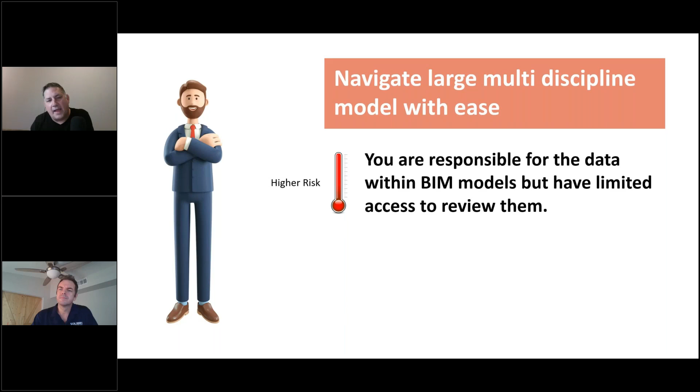BIM models are large, they're multidiscipline. It's a high risk if you have limited access to them - if you can't see what's in that black box, but you're responsible for what happens in it, that's a high risk. How do we lower that risk? Well, with Solibri, you can quickly open any model, control visibility, even add measurements and markups in a very simple fashion.

John, would you be kind enough to share your wisdom with us and show us how that could happen, even for a senior architect? Yeah, sure, Joe.

Right, yeah, I'll try to cover it low level and high level because we have some people that already use Solibri. At any time, Joe, feel free to hit the pause button for me on the demo, and we can dive deeper if you want to roll back and go into more depth. So this is Solibri, this is the interface, and this is the model layout.

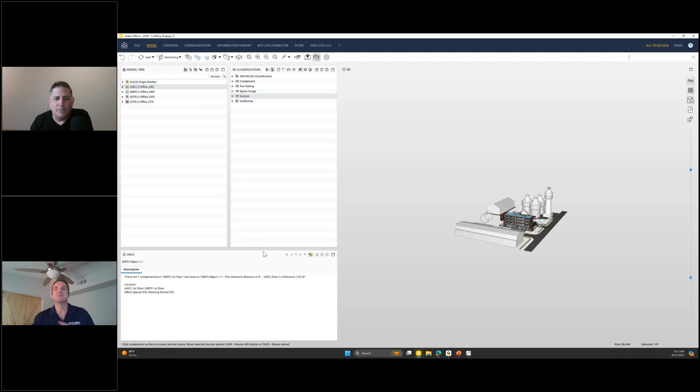I don't want to get into the details, but you'll always have a 3D view picture of the space of the project. On top of that, you have a BIM, a building information model, so you have all this information at your fingertips, and you want to actually harness that as well. These views are grouped into different layouts.

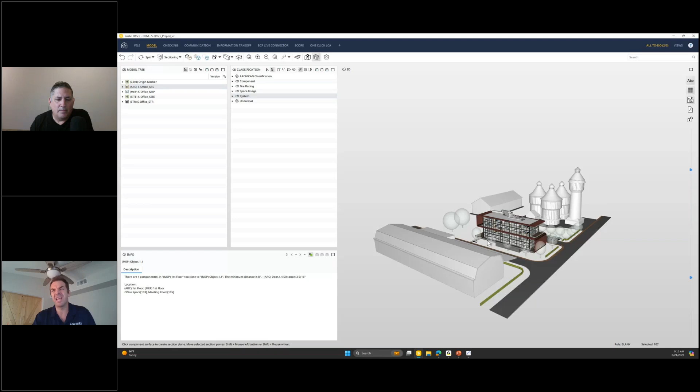What I'm showing you now is a layout to interrogate the model quickly, because design applications aren't tailored to do these reviews as fast as Solibri. So if you wanted to, you can put on your structural hat and isolate the model like that. If you wanted to look at just the MEP, you can turn those components on.

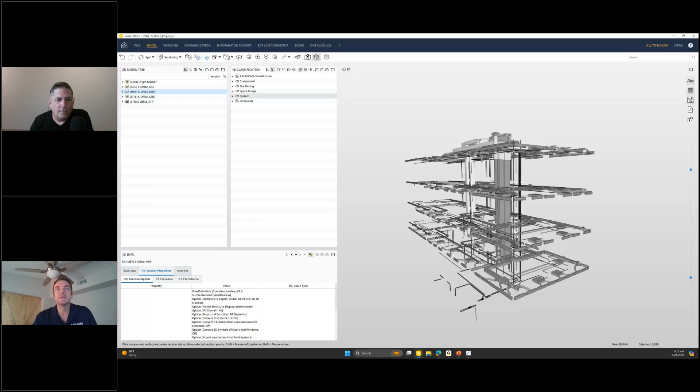You can actually go deeper into those individual systems if you wanted to see where are my ducts and where are those individual types of duct systems in my model. So you're taking the best of both worlds, the information and the 3D model in that space.

If you're interested, these IFC models are well structured. It's not from a specific design application, so you can have your stakeholders actually view into these review softwares, since it takes less time to learn something like Solibri than a full-blown design software in terms of navigating around and getting the use out of it.

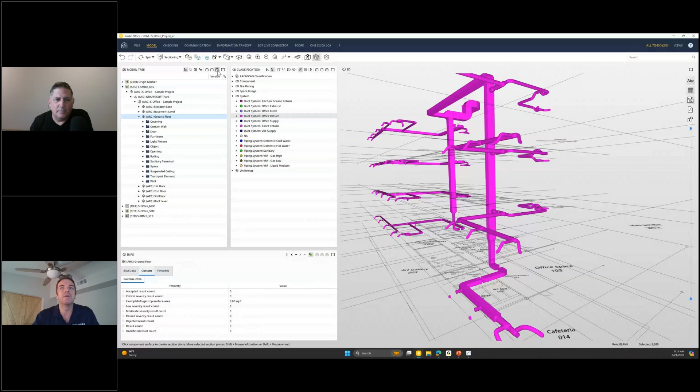You can actually peer into maybe just the ground floor of your architectural model. I guess these curtain walls span up the entire floor, so I can turn those off. I have my spaces color coded, so I can turn those off too, and peer into this first level and see kind of a floor plan. If I wanted to, I could actually take an inventory.

In this model tree that's well structured, I'm focusing on the architectural model. I can turn on these three groupings, and this is a selection basket. Think of it in terms of what you want to visualize and what you want to work with.

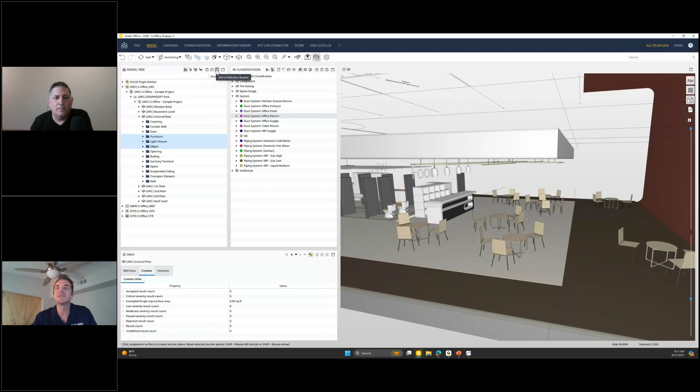So now I've just isolated, we're isolating and viewing the information that's important to us. I can slide down what is called a footprint control, and this basically superimposes a plan view.

So now I can actually do a walkthrough of the model with the inventories of the furniture and see where I am.

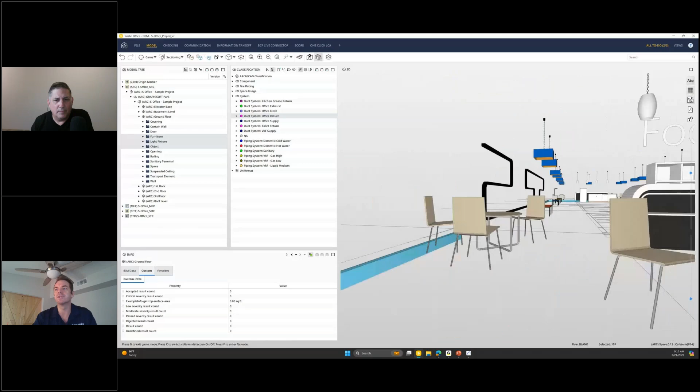And if you're more comfortable, maybe you can take a top-down view. We have different perspectives, actually called a perspective or orthographic projection. So if you want to take more of a plan view, you can zoom in and say, okay, here's my cafeteria where my tables and chairs are.

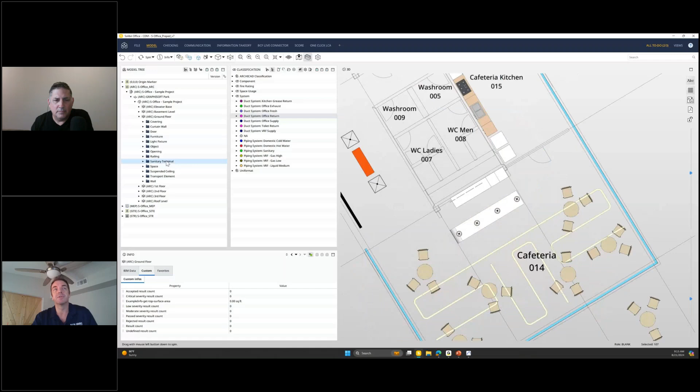And if you wanted to, you can search on your sanitary terminals and then look at those, and those are my sinks and my toilets.

One of the features that Joe and I are quite fond of is the simplicity of the sectioning. You don't have to know where your section planes are in X, Y, Z, but we have a tool called sectioning, and if you hover over it, it'll give you a little hot tip of all the different hotkeys, so you can really quickly, just by hitting keys on the keyboard, tailor to what you need.

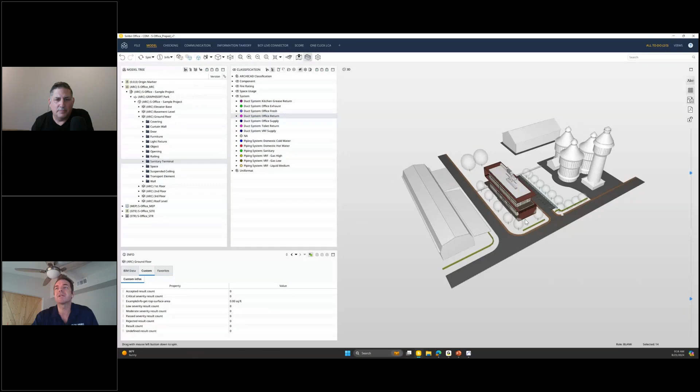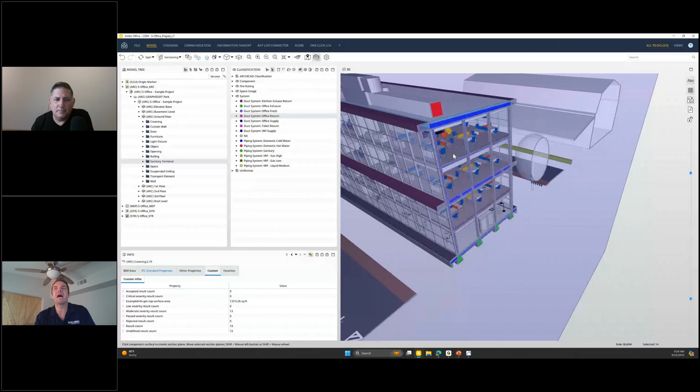But even at that, it's so simple. You click on a surface, let's go over here, and think of it, first I have to click it. Click on a surface. Now I've got a section plane, but think of it kind of like a CAT scan or an MRI, or maybe one of those anatomy books of the human anatomy, where it actually color codes the systems of a body. This is like the systems of your BIM, and it's actually color coding, and you can customize it.

I have mine set to be blue for architecture, structural green, and MEP is red. So as I cut through and splice through this model, you can see I've come to here my stair, my fire exit stair. And you can see the structural - this is probably because it's fire rated walls here, structural walls, and this is my red systems of MEP.

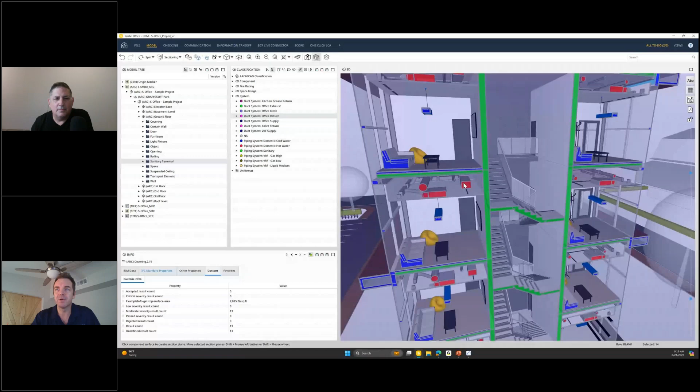If I go a little bit further in, here I can see a mechanical shaft, here's my little elevator shaft, and mechanical runs down. And again, you can even turn on spaces here.

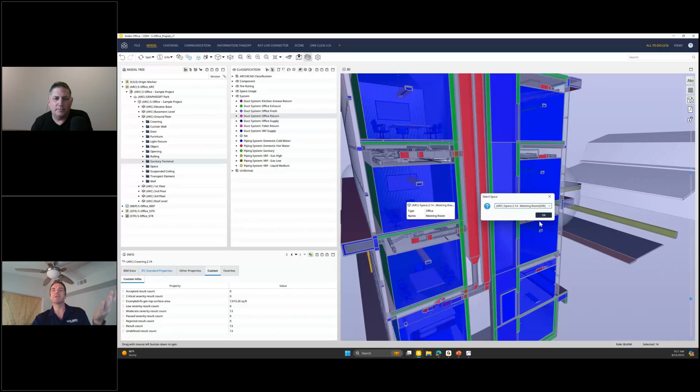If I wanted to, I could actually section real quickly just around this space - this is my meeting room. Click OK, I have my walls and the spaces turned on. Again, I could use keyboard shortcuts, or I can just turn off walls, turn off spaces, and then there you go.

I have my sectioned room. Wow, right? You can turn this on, and you can drag these little corners here, which is pretty neat, and you can actually drag them up, if you get to it.

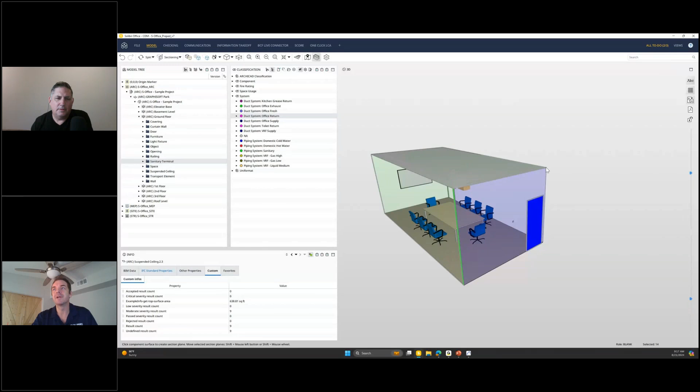There you go, sorry, I keep clicking the wrong button. No, there you go, beautiful. See how simple it is, wonderful, because there's so many different ways you can section these planes so quickly.

That's the gist of it. It simplifies the BIM experience for an architect to get in there and start, maybe later in the evening. I know many of you work late evenings, but just open up the latest, see what's happening, make sure everything's on track. That was beautiful, John. Thanks so much. Let's go a little deeper into visual checks. You did a bit of that, but let's go further.

So what's high risk, John? When we look at high risk, in terms of BIM, as we mentioned, the senior architect is often on the outside looking in, maybe asking for or waiting for a set of drawings to be created. But that's higher risk because that means possibly hours, days, and weeks that are missed. But with Solibri, we can actually apply color coding. So if you wanted to check the fire rating, you don't have to look at the plans to see what the fire rating is on every wall. You can visually color code the model and spaces, and even extract quantities.

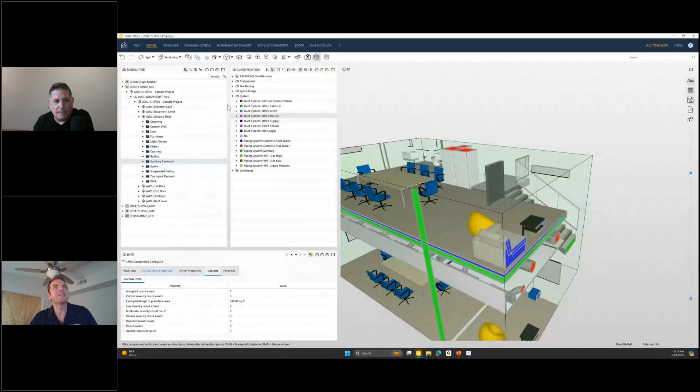John, can you show us how that's possible, this color coding to visualize the model and the data? Yeah, sure, Joe. As you said, maybe we didn't say it directly, it's called classification. You can think of it as organizing your components by some property or category.

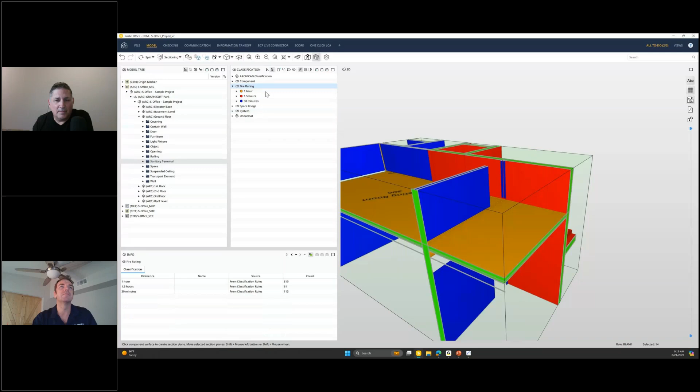So I showed that briefly with the systems, but as Joe mentioned, you can do that for fire ratings. If I wanted to put on my fire life safety hat, I could click on fire ratings and turn everything on the model, turn my fire ratings on, and you can see it's grouping these components and visualizing again best of both worlds, information and model based off of those fire ratings. So if I wanted to just focus on the 1 hour, 1.5 hour, and 30 minute ratings, you can see these are predominantly coming from my structural model for my 1 hour, and these 30 are my architecture partition walls.

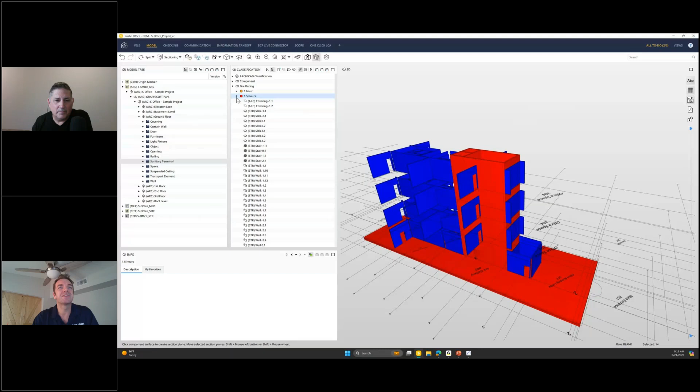You can turn things on and off and dig into it if you want. Sure enough, this is my 1.5 hour rating structural walls that goes down my fire exits. I can see my elevator shafts. And just to clarify for everyone, we're looking at it through fire rating, but we could also look at it through structural or non-structural members. We could look at that data in all kinds of different ways.

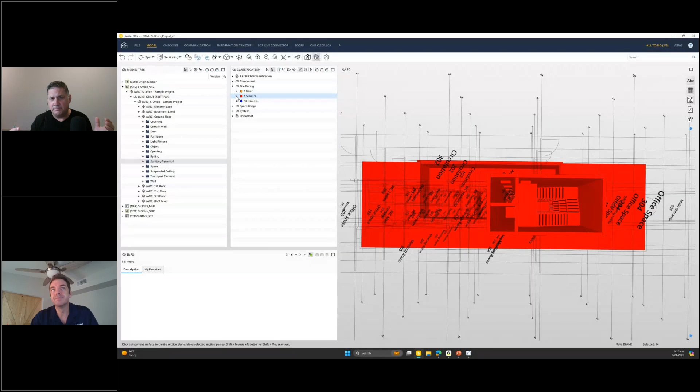Is that correct, John? Yeah, so what I did was, if you look at this, all of these components have a property associated with them. And it's nice because it actually standardizes where they're located. So it's grabbing the fire rating, and that's how it knows that this slab is a 1.5 hour fire rating. What it does is take that value and maps it into this classification so you don't have to go digging around and do it. Solibri does the work for you, going off, finding all these components, seeing does it have this property, and if so, what's the value, and it categorizes it accordingly.

And that can be done automatically. Like if you wanted to look, you can see that it has the standard properties of a slab. You can tell whether or not it's load bearing, as you mentioned. Now I could just very quickly, if I wanted to, click create classification and do that on the fly as well.

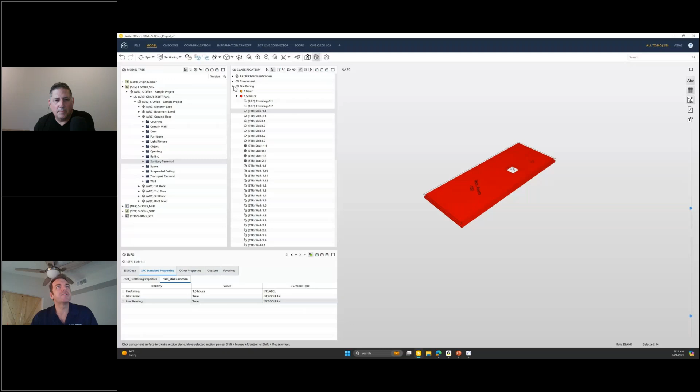We mentioned space. We have a space usage here, and think of that as the functionality of the space. You have a room name, it's a corridor, it's a stairwell, that would be circulation space. So as I expand this out, Solibri, what it's doing is not taking the value and mapping it, it's directly from the value. It's actually saying the value is a stair, or it's a lobby. So that means it's a circulation space, and that's how it's smart enough.

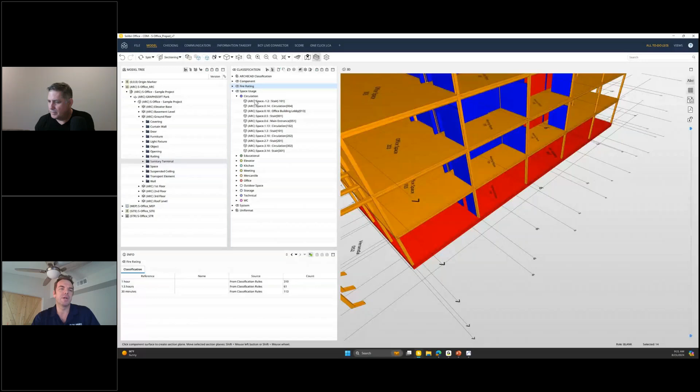Because when it comes to any type of check, how do you know the difference between a sanitary terminal that's a sink versus a toilet? You have to look and see what the type is. So that's essentially what Solibri is doing, and again, you can either look at it from this perspective.

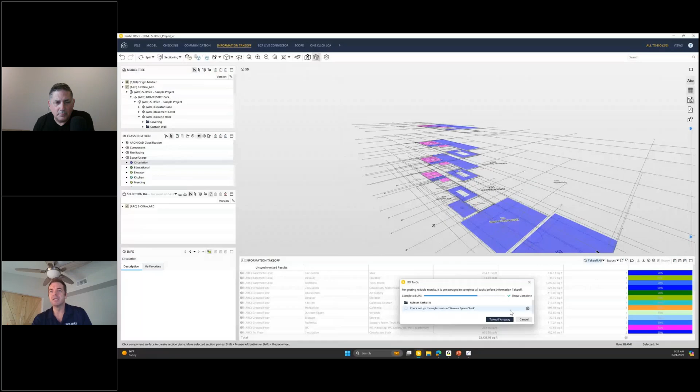There's so many different views you have in Solibri, and what I'm going to touch on is called takeoff. Think of it as a room schedule, or just a spreadsheet. You're pulling out quantities, you're pulling out information from the model.

What it does is I can select on multiple rows here, and as I click on those rows, it's actually isolating those components. In this case, they're spaces. So I can actually see the information related to this ground floor, the circulation, and the areas.

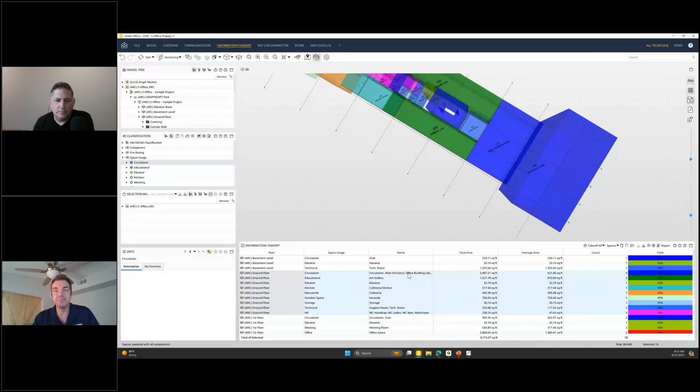So it's saying, again, circulation, lobby. For instance, it knows that a cafeteria is mercantile, and I can actually jump to that location as well. Select on multiple ones - remember the kitchen, I think was under, oh, it's right here. Kitchen, cafeteria, again, it maps that. So I can actually select on multiple ones and kind of get a feel.

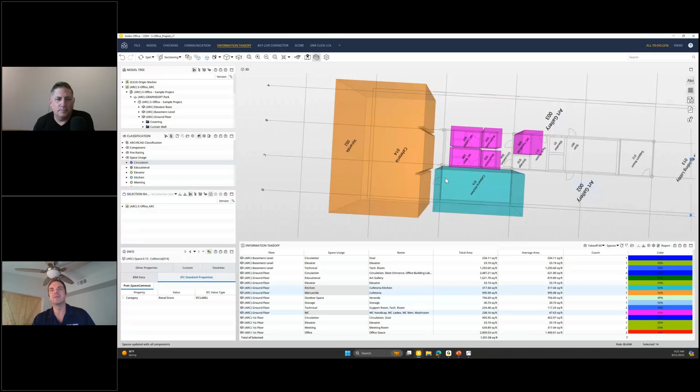I need to have my water closets and my toilets next to my cafeteria and that space. And again, you can even, if you want to, kind of do a walkthrough. So you can actually be inside of your room schedule. Walk around, turn things on.

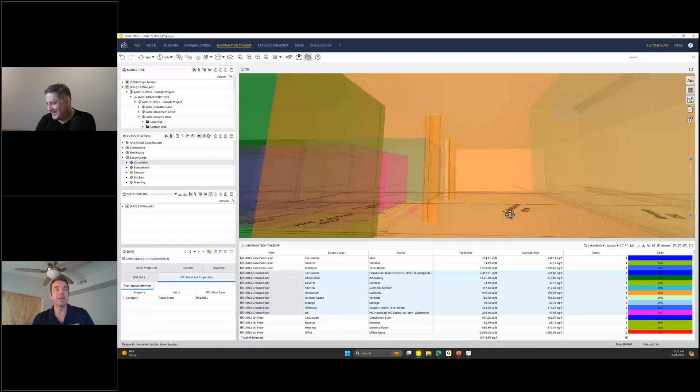That's fantastic - I can turn on my walk tool, turn back on my space usage, and start turning things on like walls and doors. And as I walk through, again, you can see, all right, here's my circulation space. Here's other circulation. Here's a little toilet. So that's how you can get a walkthrough and understand the layout of your building.

Well, it's like shining a light into that black box and color coding it however you want to see it. And that's beautiful. Thanks for showing us that.

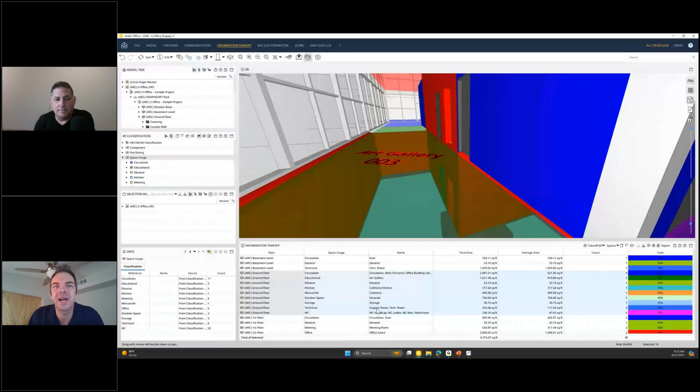I forgot to mention, as you click on them, it actually counts them for you. So you can see as I select on this, it's giving me that square footage. So you can do your takeoffs if you're interested in that.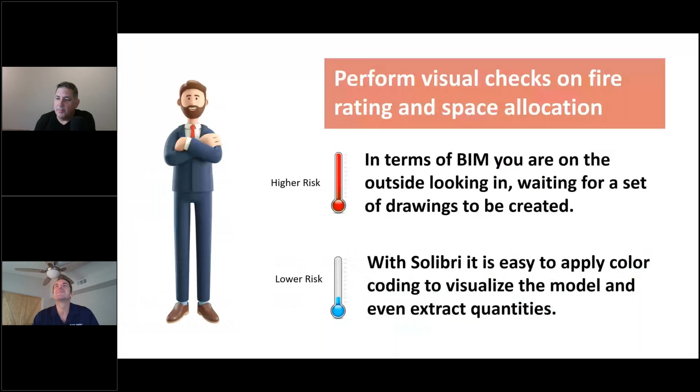Nice job. Let's talk about our next use case scenario. This is where Solibri shines the most. Now, there's many other features like John has shown, but when people think of Solibri, they think of rule checking.

But let's talk about not having Solibri and the risk you run. Projects get reviewed - no aspersions on anyone on how you do things, I'm speaking in general here - but projects are typically reviewed in a manual, unscheduled fashion, and things can get missed because of that.

However, with Solibri, what someone can do for you is take your knowledge. You say, well, I want to make sure there's a drain in every washroom, at least I want to check - that's a thing with me, I've seen big liability with not having a drain. So I want you to take my experience, my pain, what I've learned, and make a rule out of it so that every project gets checked, and every project will get checked by your knowledge on a consistent basis.

Now, I think John's going to show us some slides here that's going to show us these two approaches and how Solibri is superior to manual checks.

Yeah, exactly. So imagine you're an architect and you're juggling multiple projects. Here's your architect, here are all your projects that you have to contend with, each with its own challenges, its own deadlines. So you can't be everywhere, as Joe said. It's nearly impossible, and once things start falling apart, things start slipping through the cracks. You might be missing deadlines, but that crunch is actually going to make you have human error.

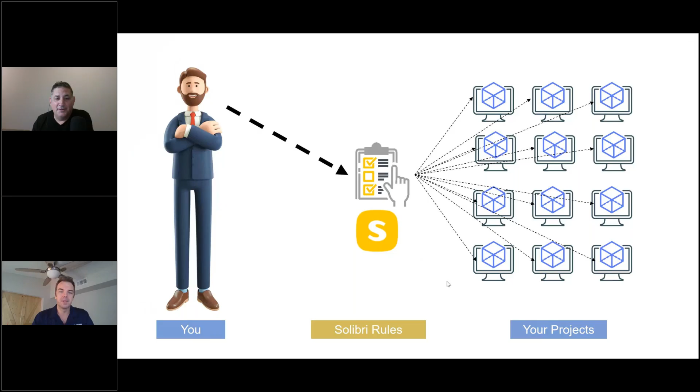That's great. Hey, John, can you show us this in real life? Into another layout, you can think of these as different roles or different perspectives or different lenses. Yeah, so this is different this is a different hat.

Different hat, exactly. So before you're reviewing, not in the checker, and again, all of these different rule sets can be different. You actually have roles in Solibri, so you can do energy analysis, accessibility checks, or what we're going to be showing are more of the coordination types of checks. So what I'm going to be focusing on is a component distance check.

Now what I'm going to do is open up the rule parameters, and as you can see, it gives us a nice little graphic. And we have a whole bunch of different ways you can check for these, what are soft clashes. How close is it to one another?

Now this one is just doing the footprint, but you could do it above and below. Say you have a pipe that was to burst above an electrical room, you can check for that with offsets. But this one's checking for the footprint.

You can see here that if there's a light switch that's closer than 6 inches to a door, that could cause problems with the structural of the door. So in Solibri, and you can change this. I mean, these are just filters. Think of it as grouping or categories of what you want to check. And it's just saying if it says switch in the type, then you want to check how close is the door.

I'm sorry to interrupt you, John, but you could do the opposite. You could say how if a switch is too far from a door. All right. Can you do that as well? I mean, you don't have to demonstrate it. I'm just saying you can go too close, you can go too far.

Yeah, exactly. I mean, it doesn't have to be within the footprint, it could actually be checking for the door swings, right? So obviously something would be like those funny pictures online of a toilet that has the door cut out or whatever.

But that's basically it. Yeah, exactly. You can check for the maximum distance. Does something have to be no further? Like a fire extinguisher can't be further than 10 feet from the fire exit, right?

So yeah, exactly, Joe. You can change these. Again, it's not a one size fits all for BIM. You're going to have to custom tailor these. And going back to the black box, Solibri isn't a black box. You can custom tailor it and tweak it to however you need.

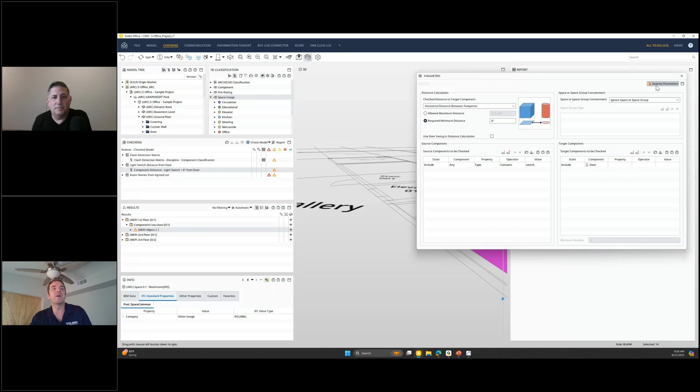But another beautiful thing about it is the way it presents the issues, right? You have this results view, and it has its own built-in category. So it's actually giving me a visualization out of the box showing what the floor is, and then what are the components. And if I select on it, it actually tells me what room it's in. It's in my meeting room.

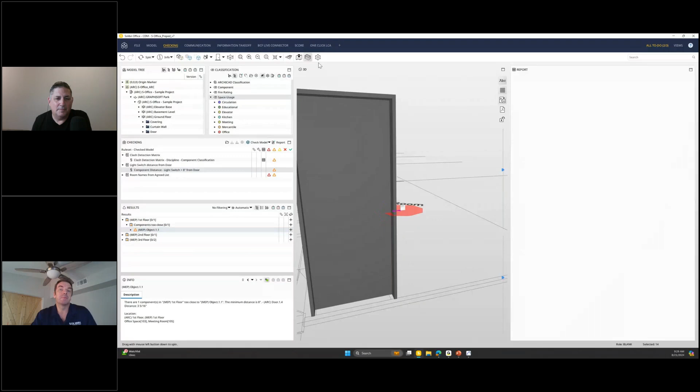And depending on how you want to create this, what is a slide that you're going to inevitably have with your coordination meeting, I could take a top-down, again different perspectives, different views. I could take a top-down view of it and create a slide for it. Right? Shows you the dimensions. I'm not going to go into the issue management, that'll come later. But again, this is the second floor.

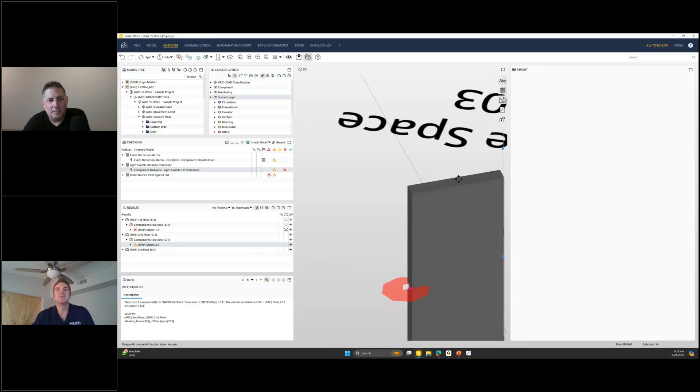I could move over here. Maybe I want to see not the perspective, maybe I want to turn everything on. Click view all. And then maybe I just want to zoom out and see, oh, this is my meeting room. And I can highlight again. You'll see this later in the portion where we're doing the coordination. But now we have 2 slides.

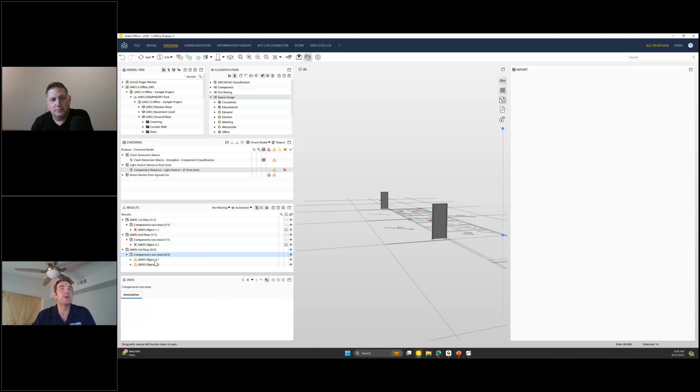Or maybe you just want to see where the hotspots are. If I do a perspective view and a top-down, you can see when I select them all, it looks like they're all in the meeting rooms, right? Too close to the doors. So I can actually select on this multi-select issues and create one slide. Again, you're trying to save time, save money. You don't want to create individual issues for each one. And again, as I said before, you can automate this.

You can have this run unattended, autonomously, or you can go into the details of it. It all depends on what you want. Do you want to actually shine the flashlight into that black box, as Joe said?

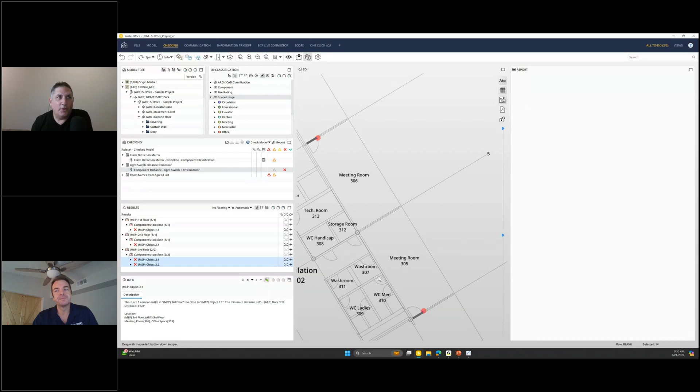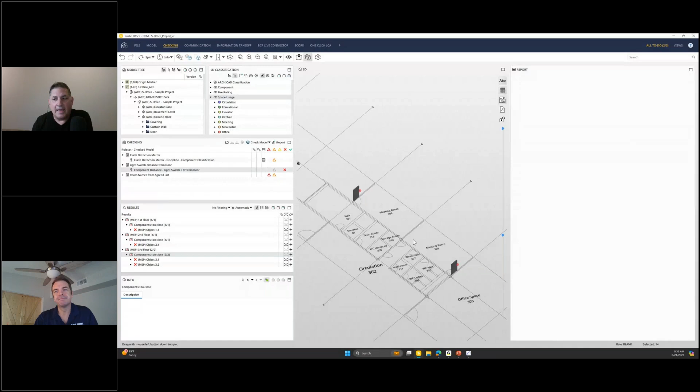Imagine the frustration of an architect who sees the same issue come up on multiple projects. I'm not an architect, but I can imagine how frustrating that would be. This could help eliminate that by taking that knowledge you have and making a code out of it, making a machine out of it that can be refined over time. This is fantastic for reducing risk, and the fact that you can apply it to every project consistently is a game changer.

So thanks for showing that, John. That was very, very good. You're welcome. Let's take a look at the next use case we're talking about.

Let's face it, architects are focused on architecture. That's your focus. But part of the scope you deal with is coordinating the engineering designs and doing coordination between them. I hope I'm not out of line to say this, but I think this often gets left to the end of a project, and perhaps that's not the best time. Perhaps doing it a little earlier might be less risky than leaving it to the end.

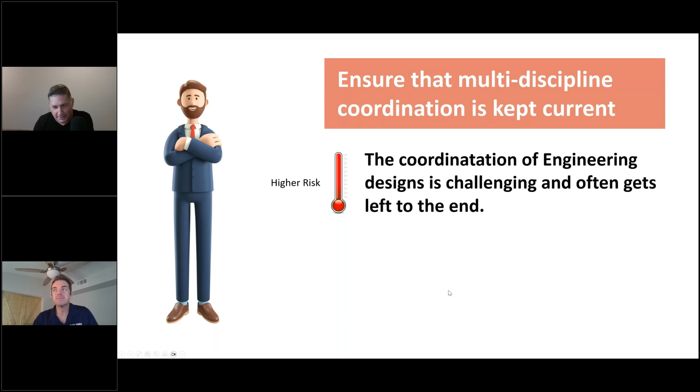With Solibri, we're going to show a new feature here. If you're a Solibri user who hasn't downloaded the latest version, this is new. With Solibri, you can display a report that organizes coordination issues throughout the project, showing how everything could affect everything. John's going to simplify it and show us how we can group things, but you'll be able to see how anything could affect anything. John, can you walk us through that?

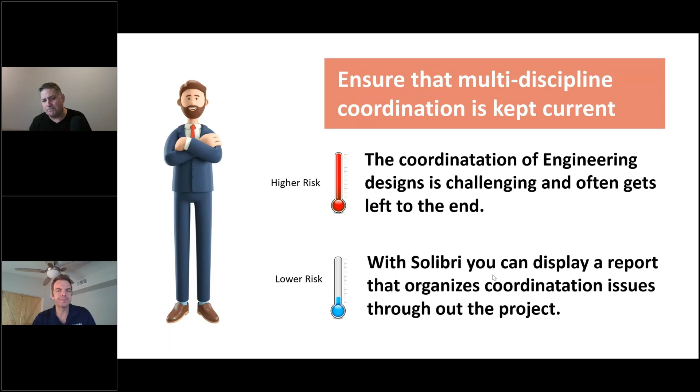Sure. What's called the clash detection matrix. I think it was one of the first rules ever developed - the general intersection rule. But the beauty of the clash matrix, once I get this to here...

Bear with me one moment. Oh yeah, take your time. I guess just refreshing the screen.

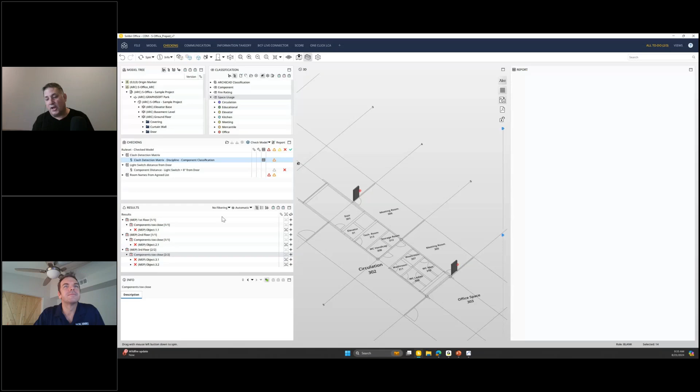One of the problems with traditional clash detection - and just to step in front of John - is sometimes you can get a long list of false positives. In other words, it's not that you get too few clashes, you tend to get too many, and then you can't find the legit ones in the group. That's the problem with modern day clash detection. But John's got a beautiful chart here that takes a different approach.

Yeah, sorry about that, I just had to refresh. No problem, no, I like a little more airtime myself. So there you go, let's talk.

Again, what he mentioned was you get this report - you're using the report of the issues while you're setting up the actual basis of what you're checking, because this is the actual parameterization of the check. You're going to set up different levels, and you can customize this any way you want. Don't think it looks overwhelming - the beauty of it is it's giving you all of this information at once, color coding things and giving you counts to work from.

So the matrix, think of it as a table. You have different levels of where you're going to start from - perhaps the discipline, as you see here. Underneath that, it'll actually calculate or find whatever components are in your model. You can click a button and it'll show you the models or components in your MEP building services.

In traditional clash software, a lot of times you're just stuck with this flat list you have to go through, and it's a big one - a big list. They'll give you some tools, like you can click on something and group by that component.

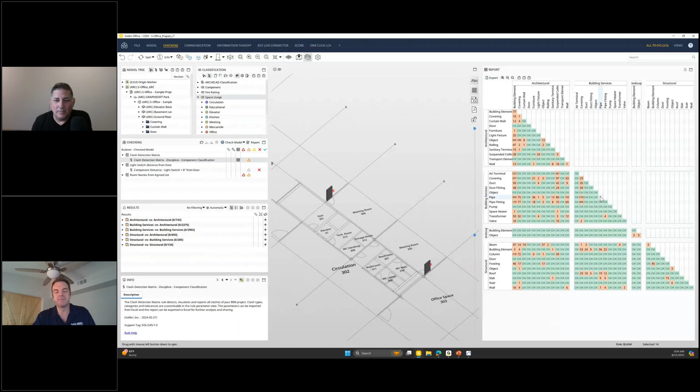With Solibri, you get the best of not two, but three worlds. Again, you get this 3D display. So if I wanted to, I could click on, for instance, just the pipes and pipe fittings that are running into my architectural model.

And I could work from here, or I could work from the 3D view, right? I can come in here and start clicking on pipes that are running into one another. Or I could work from this hierarchy. This is in here, it's well organized, but it's still buried underneath this structure.

That there's a pipe versus the wall. I got 103, and that matches up with this value here. I could right click, say select all in results view, and now it's nice enough to give me those selected.

So I can work from here again. Or what I showed before is that select basket - it basically doesn't just isolate, but it also lets you kind of manipulate whatever you put in that basket. So I set those to be the ones I want to focus on, and then I can actually filter.

I can put that lens on my clashes. And so now it's going to take all of the other clashes that were listed before when I set no filtering, selection basket, all.

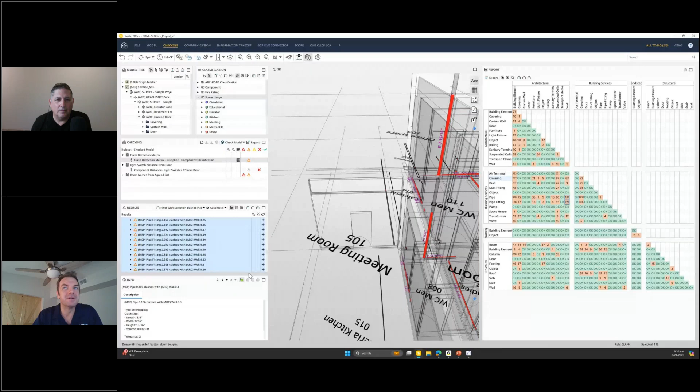Let me see if it's giving me a little freeze. There we go, sorry, I got 3 applications open.

By the way, I got some - I'll show you, your machine's doing well. Well, yeah, it's the fan's spinning so fast it's about to lift off the desk.

So these are - it's limiting. It's showing you now only those 172, and you can see it matches up with the counts here. I got 103 plus 69.

So what I want to do is chip away at that. I don't have the time to go through each one of these individually again. So I'm going to put on a different lens - my MEP system lens. I showed you that classification before.

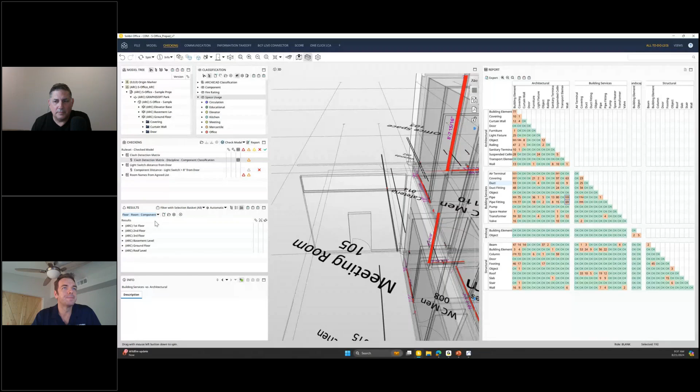So what I do is I click on this. For some reason it's in room. Let's see - essentially what I had before was I was actually looking at the distance between the light fixtures and the doors. So what happens is now it's kind of resetting because it has to calculate the rooms.

So perfect, this in essence - when we talk about triple checking your parachute, this is like a triple check, because you can have it in the clash detection matrix, you can visually see it, or you can have the long list of the checking results. Yeah, exactly. So what happened was it was actually looking at, I think, 5,000 checks and trying to figure out where they are in each room.

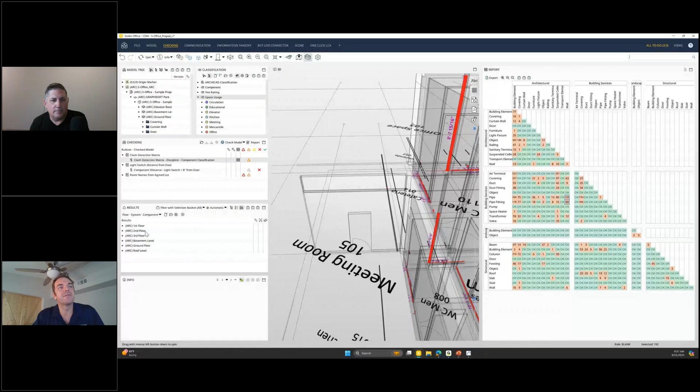So instead, I'm going to look at it from the perspective of the system, which I have set now. So if I click on the ground floor, it'll now limit just the clashes on the ground floor. And then, well, that's fine, but what if I wanted to actually just look at some of these systems here?

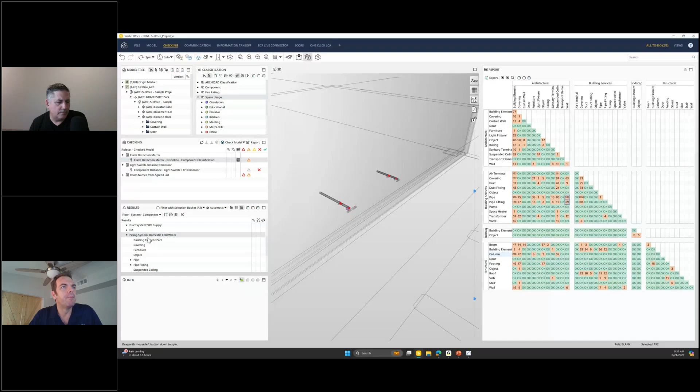I could look at my domestic cold water. So some of these are non-issues, and we do have a rule - the general intersection rule - which can create exceptions, so that if it runs straight through the wall, you can just turn those off and ignore them. But what I'll look at is the sanitary.

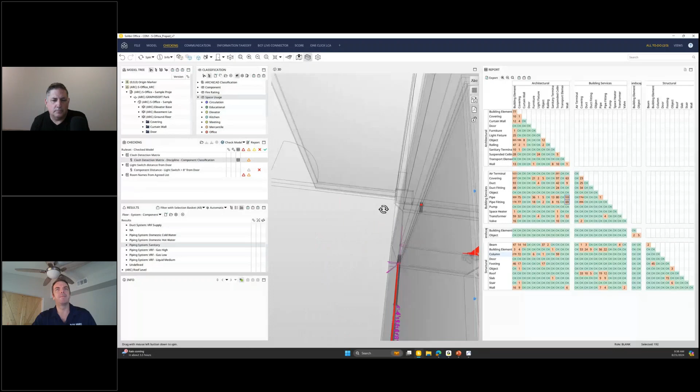And again, best of 3 different worlds - I can actually go into the model now and say, okay, it looks like I got some pipes that aren't directly inside, they're kind of hanging out of the walls, right? I can actually go in here, and what I'll do is turn on everything and get a little eyeball of it. Hide - oh sure enough, there's a pipe that's running alongside this wall.

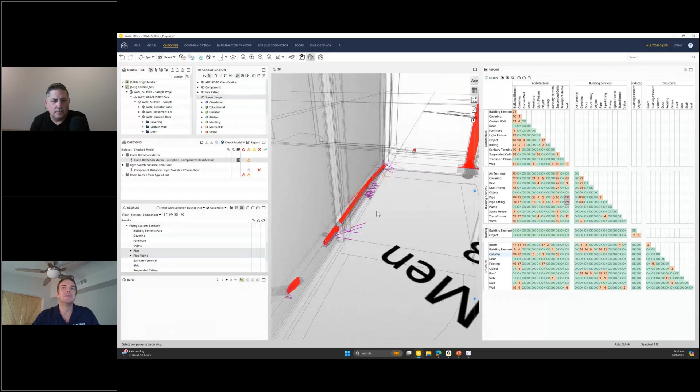So again, if I click on the issues here, what I can do is turn on my selection tool, and I'm going to select it, but actually just drag around it. I'm going to drag around these components that I want to create a group for, because I can see it's a span of pipes, and there's pipe fittings, there's pipe segments. I want to get that one too. So as you drag around, it'll select whatever's inside your box.

And now what I'm going to actually do - I have to click on the wall too, because that's part of the problem - I'm going to go to that flat list, because we do have a flat list. If you want to work from a flat list, we have it, you click the flat list. Actually, first I have to click filter with selection basket.

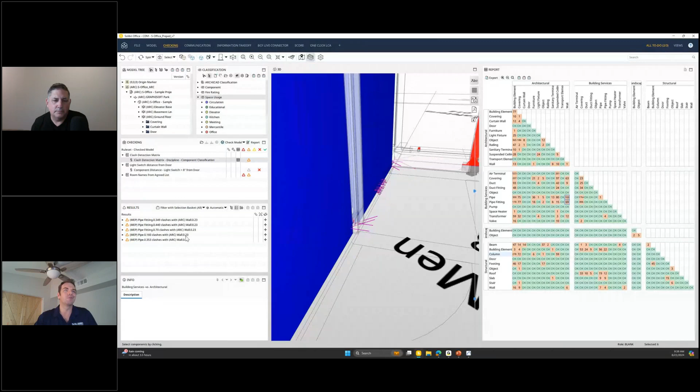Again, set the selection basket. Now I'm working from what I had selected. It's my flat list. I have 5 clashes, but 1 issue. It's not about clash management as much as issue management. I don't have to go through each individual pipe segment. It's all one. I create 1 issue, 1 slide for my team to review to just say, put that in the wall. Does that make sense?

And again, you get all this other information down here as well - the length, the tolerances, and everything. It tells you which room it is.

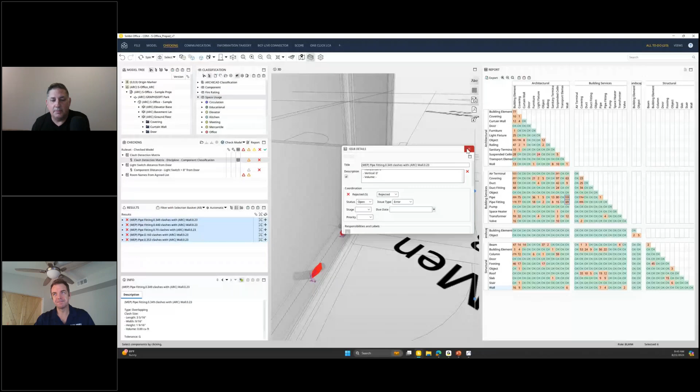Beautiful demonstration. This would be a little more technical, but the ability to group these things and filter them really can make this manageable. Would you agree with that?

Oh, yeah. And I think also to touch on, I can come back in here and set these back to what I'm working on, and come back into this view and set it to my selection basket. And you can see I've knocked out 5 issues.

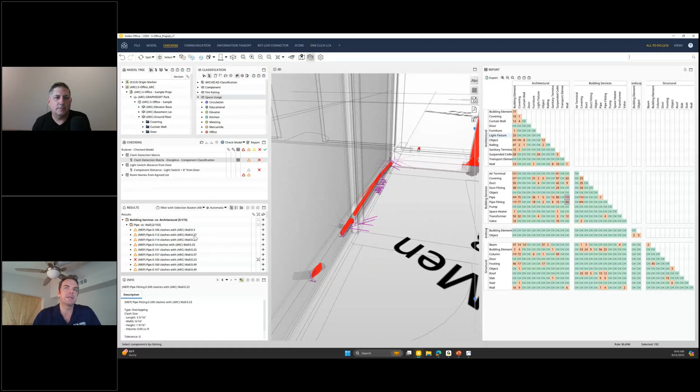Otherwise, I'd have to go through 5. And how are you going to work that way? You have to kind of click on - I mean, you can do it that way if you want. You could actually click on a pipe here, and you can see all of that issue data.

So the beauty is you're using the 3 worlds. You got the clash matrix, you got this hierarchy of the results, and you also have the 3D view, so you can quickly jump around. And as I knock these out, you can focus.

I even mentioned you can actually parameterize, and that's the main benefit of this matrix - I could click on one of these cells, say that my structural duct versus my beams, say that's a high severity critical issue that I want to focus on first. I can filter by that.

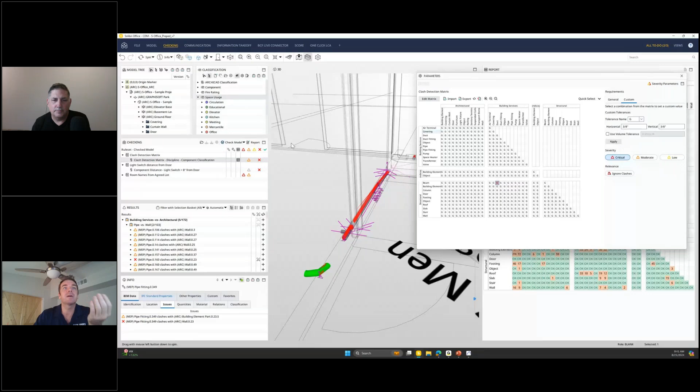So what I mean here, I can come into this checking, turn off what I've already found, and now it drops out. I no longer see those issues anymore.

Nice. Well, you keep mentioning issues, John. So we're going to have to go on to how do we handle an issue, or what is an issue. Is it okay if we switch back to the PowerPoint there?

Yeah. So one of the most dangerous things an architect does, what you do every day, is go to work and open Outlook. Email is dangerous for tracking things. How often did something get lost? How often are you searching in your email for some word that you remember? It's just not great in terms of risk management.

Things can get lost and missed. Now with Solibri and Catenda - so just to be clear, we're introducing another system, a platform called Catenda. It's an issue management common data environment, a place to put stuff and a place to track issues.

Okay, so we're going to show these two programs together. Solibri beautifully handles the integration between them, but the bottom line is you get an automated audit trail of who's supposed to do what and whether they've done it or not. John, can you illustrate how this would happen in the simplest way possible?

Oh yeah, so here's a little diagram. So here's you - you run your checks in Solibri. If you want, you can actually run your coordination meetings within the application. But I'm not going to get into the details of BCF Live, but you're probably familiar with it.

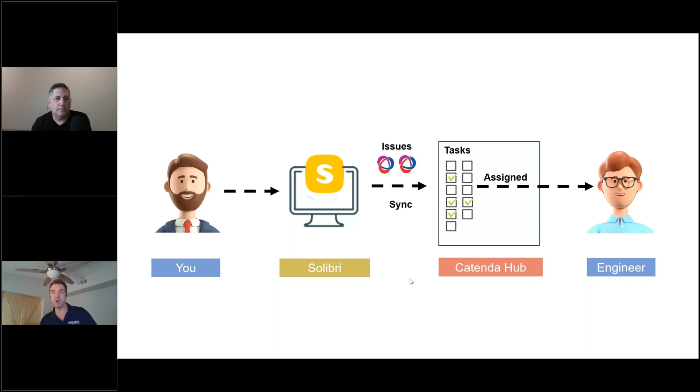Those issues can then get pushed out and assigned to the people in the applications to fix. They sync up as well. They could be working, and I'll show you. Working along, they see the new tasks are there for them to work from, they fix it, they sync back up into Catenda, and this three-way synchronization works. As soon as the engineer fixes something and comments, the person in Solibri will know just as well, using Catenda as that middleman to actually do it.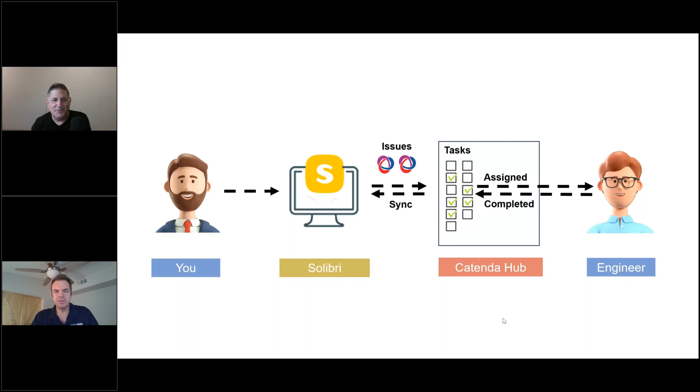Very nice explanation. I'll jump right into it, so I created some issues here, so I can go into the communication. As I said, you could actually work from Solibri, so I could create a presentation of my checking results. I could navigate around and start creating a presentation on my own, not using the checking, but I've already done the work, or Solibri's already done the work of these checks.

These are live views. Again, I could turn on everything and create another picture, a perspective or a lens, and add another slide and jump between the two. This one shows this, and this one shows this. This was the historical way, because Solibri's been around 25 years, and we didn't have CDEs back then. From here, you can create your comments.

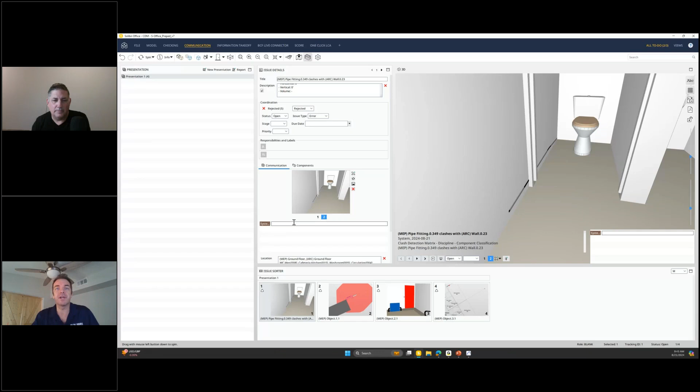But what is the whole point of BIM? Actually, BIM, not just as a model, but as the whole process, is the ability to actually collaborate with one another. So what I have here is called Catenda Hub, linked up through my BCF Live connector.

And I can click on this. This actually isn't part of Solibri, this is up in the cloud of Catenda. What I can do is I can jump into Catenda right now, and this is the dashboard. This is where you have all your participants, all the issues, and all the documents. But I'm just going to focus on the issues, what Catenda calls topics.

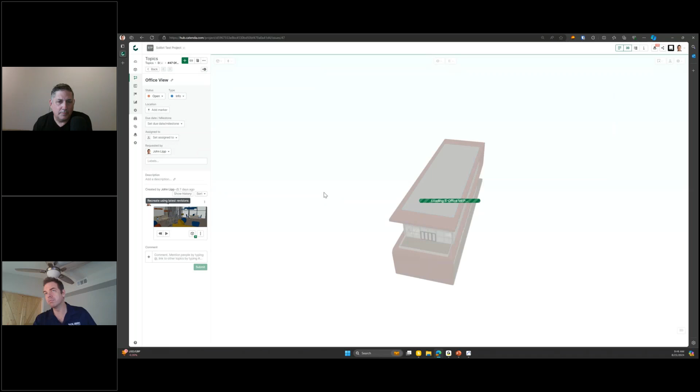So I can see where this actually came from. If I click on this, this is just a nice little information view, and you can set different parameters of, say, for instance, this meeting room. Again, people don't have to install design software, they just go and look at it on the web.

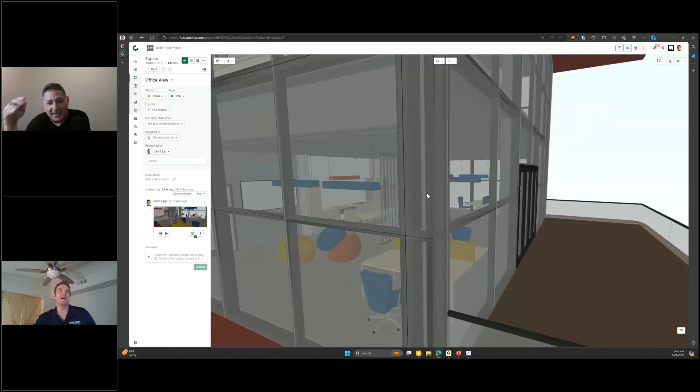So just to be clear, we're looking in Catenda now, that someone could open even without Solibri. This is web-based. We're looking at a browser, and it's really cool. It's so seamless that the audience might not follow—we went from Solibri, and now we're in a web browser that other people can access all this data and the issues as well. Yep, exactly.

So that's the whole point. I'm in Solibri looking at the same issue, so I could actually start adding information within Solibri here, like setting a date, syncing up. I mean, I could do that, I could change it to whatever. But what I want to do is push these issues I had created into Catenda, so what I can do is just import my issues that I created, and recall I created them from that presentation. So I'll just click OK.

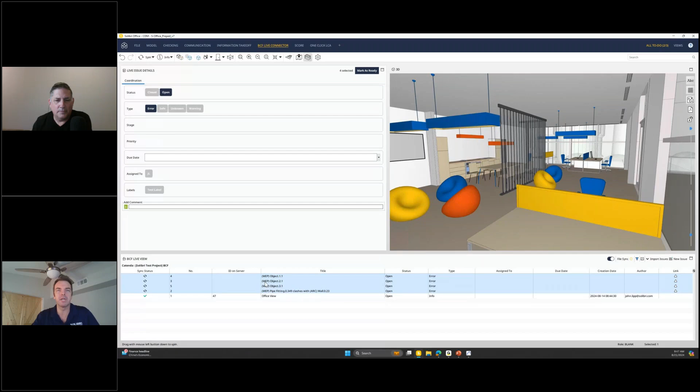And now what happens is it's not synchronizing—I want to have more control of when it synchronizes. You could just have it automatically populate this as you go, but I have it set to synchronize, so I have to click mark as ready because I actually want to look at some of these. Again, I can say, is this ready to go?

Or I could say I want to assign a date to it, or maybe you want to leave that, I could assign it to somebody, say I want to assign it to John Lipp. Again, the beauty of this is it's using the information in Catenda, it's saying assign to John Lipp. I'm the only one in this project as of right now, so I could have 50 people and then it'll populate that, and they log in with the password, everything's secure.

But what you'd really want to do—and I can mark this as ready—is you'll see these little spinning icons then start turning green as it takes those and transfers them up to Catenda.

I could just select all of them and say mark as ready. And what you'll see is they'll start spinning, and that one turned green. What it does is every 5 seconds it'll sync up with Catenda and give you that information.

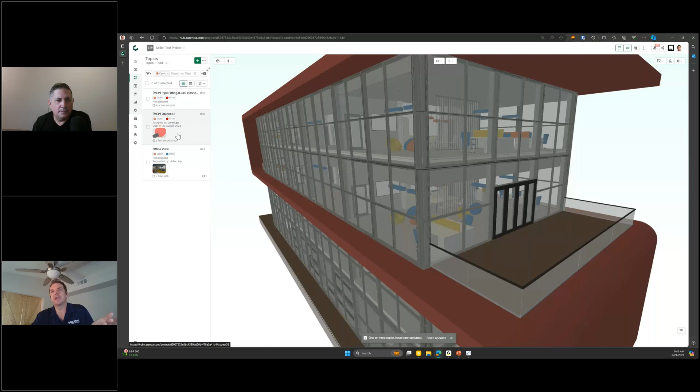So when I go back into Catenda and populate, you can see they're starting to be there. They weren't there before. Now I can actually look at that same view within Catenda. This is just limiting to the two objects, but it's more interesting.

F5 on the keyboard, just like a browser, it updates. Right, and here are my... You can see the picture that was created in Solibri with the beautiful red highlighting of the intersection, or you can actually go into the direct view within Catenda.

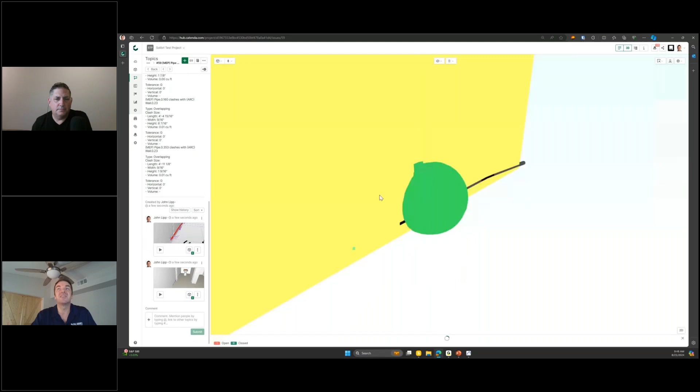Again, now it's showing that. Again, you can turn - it has all its capabilities. You can turn everything on, show all, and see that same pipe there and review it.

But even more importantly, you have to get this back to the person that's going to fix it, right? Well, Catenda has a link to it as an extension. So what I can do now is refresh here. I already have that one view of that meeting room already loaded in Catenda.

Or into ArchiCAD - this is Graphisoft ArchiCAD, that's where the model comes from. I can now come into this and say, okay, I have an issue here to fix. My light switch is too close to a door.

Again, I can click on this, and then it's taking me to that same perspective. It's taking me to that same lens of two components that are too close to one another. So then it'll update my view here. It should show me that.

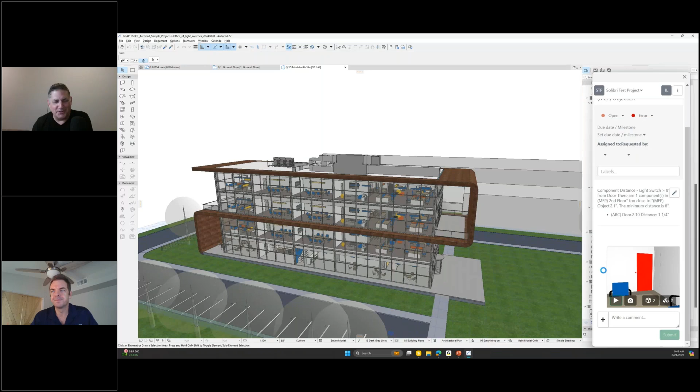Yeah, there's some magic under the hood there with the format that's used, called BCF, BIM Collaboration Format. It stores all that rich data, so any app - so there we are, we're in the BIM model and we can find the exact spot where the issue applies.

Yeah, so I just move it over here. I say, all right, it's fixed. Submit it. And now this is going to sync up with Catenda, and that comment will then go back.

What I would do is fix it, upload the models to Catenda Hub, and pull them down automatically through Solibri, through its integration through Catenda to open it. So yeah, if I go back into Catenda...

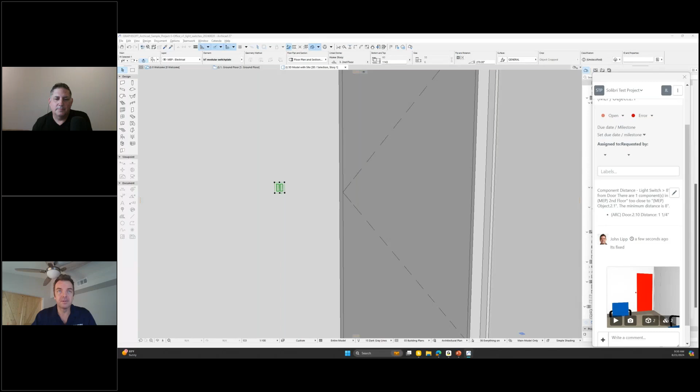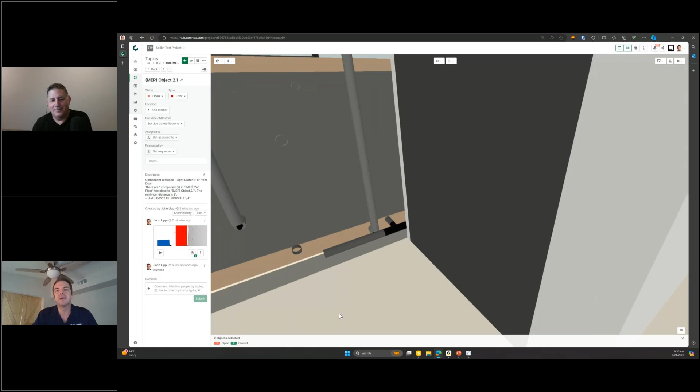I should see, if I go back into the other issue, there should be a comment somewhere. Is it this one? It's fixed. See? So now people in Catenda, they know it's fixed. And Solibri should be telling me as well.

That's terrific. Of course, it's not just John talking to himself - these would be other users to demo it. John talking to himself, which is fantastic.

But the bottom line to this is it's a complete synchronized audit trail of all the issues, all the comments, and all the resolutions, and it allows the quarterback to see the whole field when he's calling a play. Would you agree with that?

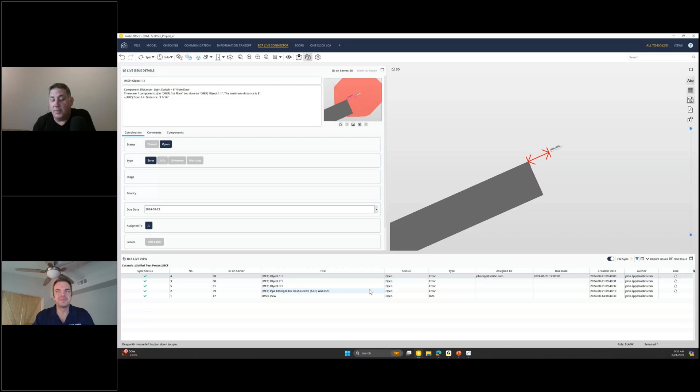Oh yeah, I mean that's the whole point of what you said with the black box, and the whole - if you're actually going to harness what a BIM is, and all of the tools that are available to actually coordinate and collaborate, it's a must.

So often we think about BIM as data, but I think some of us need to reconsider that BIM is about communication, and so it's about that herding cats thing - keeping everyone going in the right direction. You can think about the collaboration part, the efficiencies, or even looking at green building. It's not just a model; it's the entire process involved to keep people on the same page.

Well, we're coming close to the wrap up time here, so we just have a couple more to wrap up. Problems are costly - now, how expensive is a problem? Because the ripple effect hits a problem. It starts small, early maybe, but when it finally does its impact, it's amazing how much these problems can cost to multiple parties. So then, what if we just caught it first?

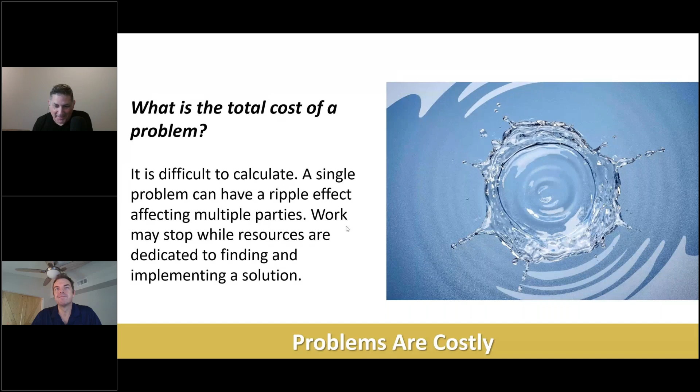An ounce of prevention, right? Issues found earlier are just less expensive. A baby issue is cheaper than a big problem. We can reduce risk by adopting a model checking approach and having a proactive attitude toward finding these errors before they become problems.

So in summary, with Solibri, just to give a high level summary, thanks for joining us so far. In terms of Solibri, it's an excellent investment, return on investment. If you just prevented a few errors every project, it would pay for itself like lickety split. Very, very good return on investment.

Next, in terms of licensing, there's a cloud-based licensing, which means that not everyone in your organization needs a license of Solibri. Depending on your size, 1, 2, or 3 might be sufficient. So it's very affordable to get this functionality to everyone with the cloud-based licensing. There's also a subscription and perpetual licensing right now, but perpetual licensing may not be around that much longer, so there's a sale on that.